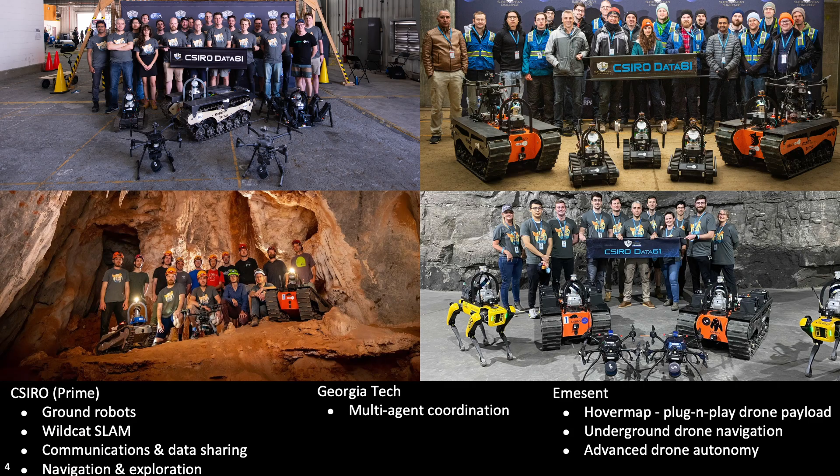This shows the Team CSIRO Data61 robots and humans through the 4 events: Tunnel, Urban, our own cave testing, and Finals. We're a collaboration between CSIRO, contributing ground robots, SLAM, communications, navigation, and exploration; Emesent, contributing aerial robotics and associated navigation and autonomy; and Georgia Tech, contributing multi-agent coordination.

This shows the evolution of the robot team through time. Here there's a few key decision points to highlight. The STIX integration event showed the inadequacy of our ground platforms. We responded by acquiring the BIA5 OzBot Titan ATR platform. Tunnel showed the excellent performance of the Titan and the strain caused by dividing our time between many platforms, so for Urban we focused on the Titan.

We also had major communication issues at Tunnel, which resulted in the switch to the Rajant-based network. Post-Urban, we were convinced of the merits of tracked robots, but wanted a more reliable small platform, so we started development of the Dynamic Tracked Robot, or DTR, and ceased development on the Hexapod. We were experimenting with various updates of the Ghost platform in the background, but earlier this year made the decision

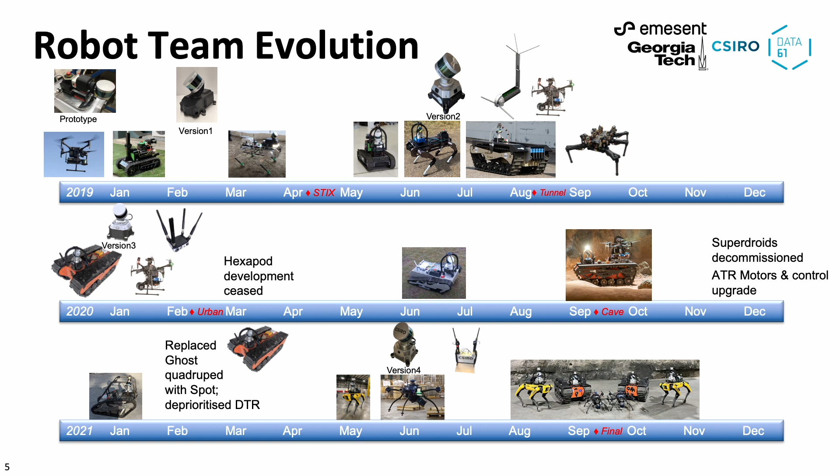to acquire Spots. At the final, we fielded a BIA5 OzBot Titan with upgraded motors and controllers alongside Spot quadrupeds and a new Hovermap UAV based on a Navi platform carrying an upgraded multi-camera perception system. The DTR was deprioritized in favor of the Spot and Titan, but we were still planning to bring them if we had a larger deployed team.

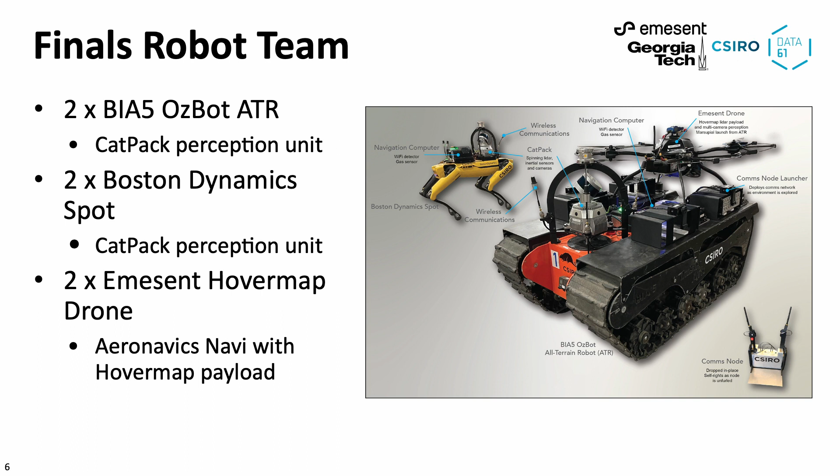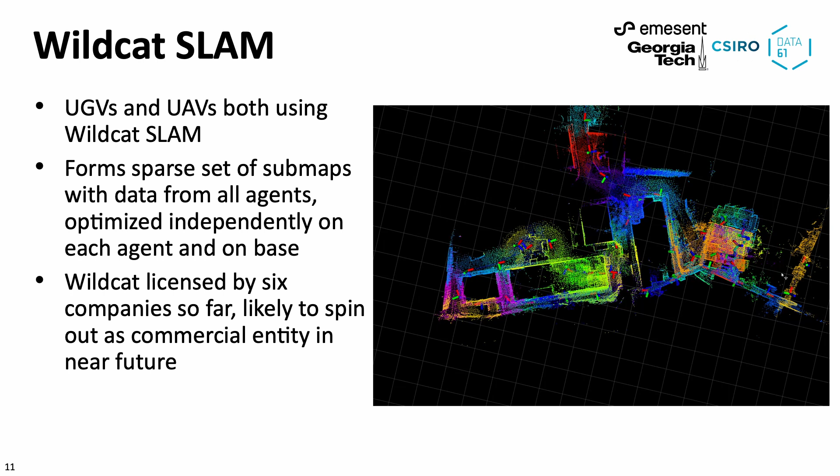First, we'll look at SLAM. Both the UGVs and drones are running Wildcat. It forms the basis of the multi-agent capability, allowing maps, objects, and navigation information to be merged on each agent. In this video, each submap is shown in a different color. We store global navigation and object detection information relative to each submap, allowing it to move as SLAM corrections are made.

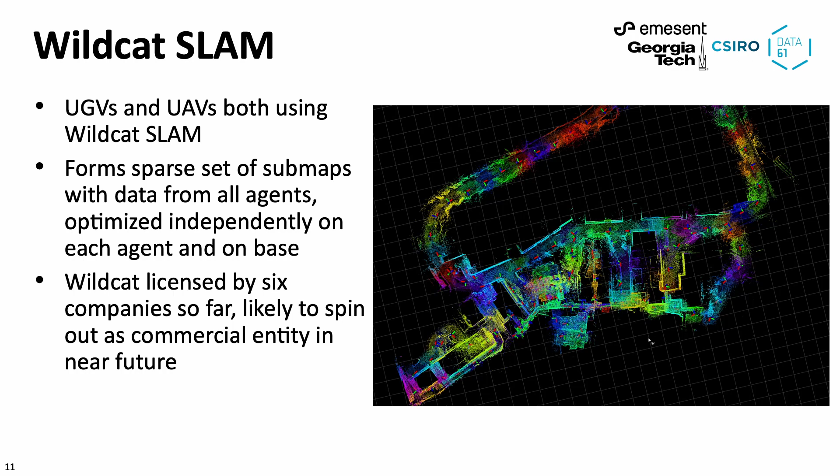Mapping is achieved through a pose graph optimization, matching surfels between subsets of frames using ICP. Further details of Wildcat can be found in the recent Tartan SLAM seminar by Kasra Khosoussi.

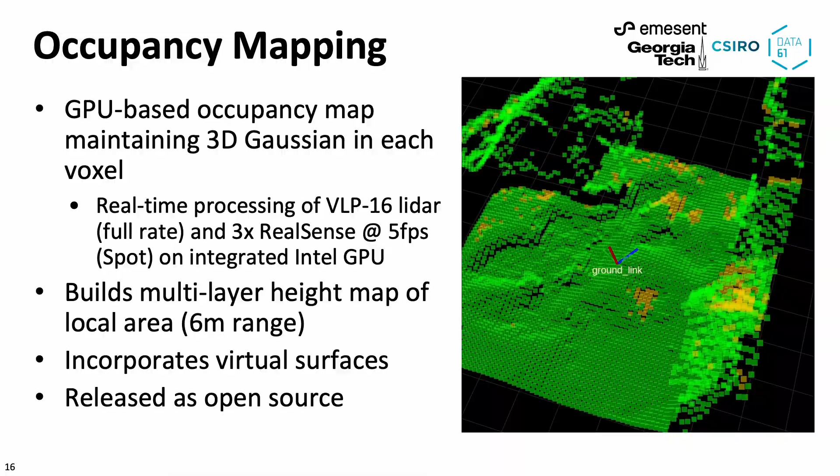The video shows observed surfaces in green and virtual surfaces in yellow as the robot moved through the cave during testing in Chillagoe, far north Queensland. OHM has been released as open source. Using height maps generated by OHM, our traversability analysis checks two things. First, the slope of the terrain under a footprint, analysing the resting pose of the object as it's lowered.

Secondly, we scan through the map looking for step discontinuities which exceed limits. The result is illustrated on the right, with virtual shown in yellow, traversable shown in green, and lethal shown in magenta.

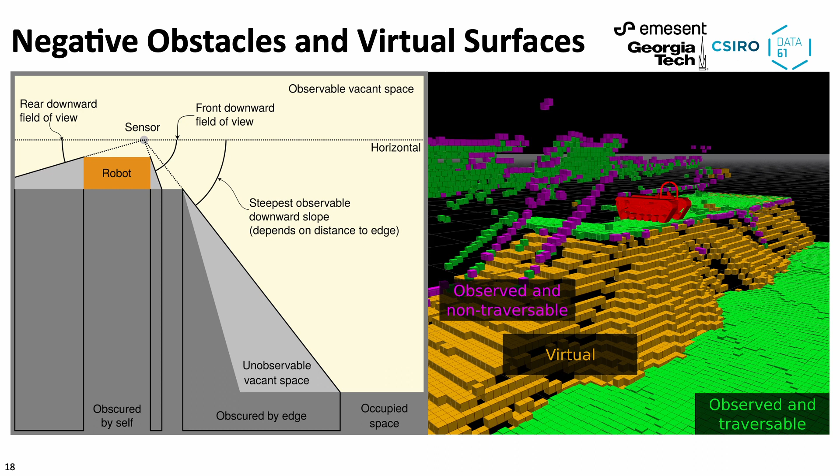Virtual surfaces provide a principled method for addressing negative obstacles. As the robot approaches the edge, it's able to plan onto the virtual surface, allowing it to continue approaching. When it gets close enough, the slope becomes steep enough to be lethal, revealing the negative obstacle. Our path planning is based around Hybrid A*, performing on-demand costing of robot footprints in X, Y, and yaw, shown here during our cave testing.

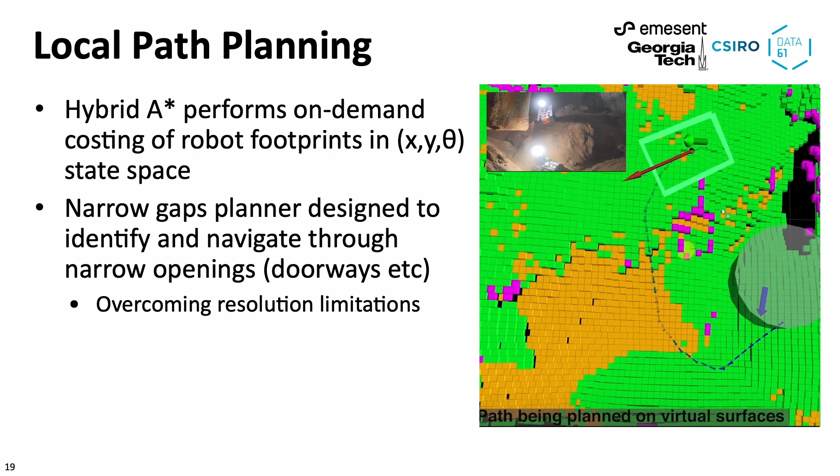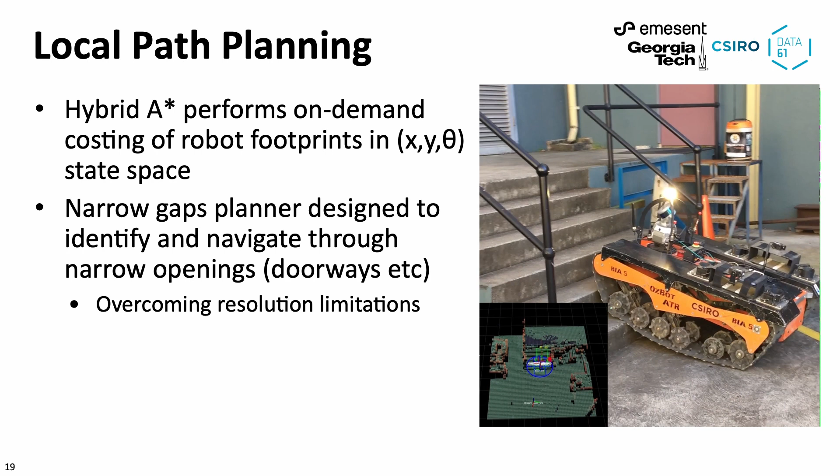We've recently introduced a narrow gaps planner, which allows us to pass through much narrower doorways, overcoming resolution limits of the existing planner.

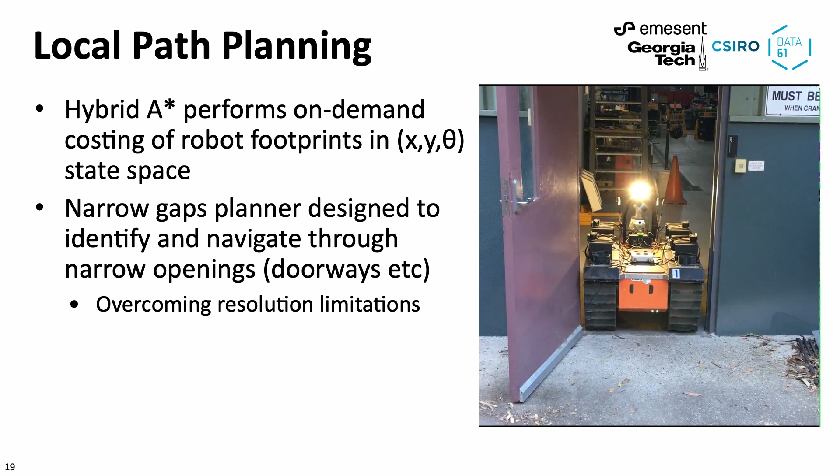Now we'll move on to global navigation. Our global navigation aims to build a consolidated map of all of the traversable space that's been observed. Navigation maps are built for each Wildcat submap, and these are shared across ground agents. Each submap is decomposed into a sparse graph using superpixel methods.

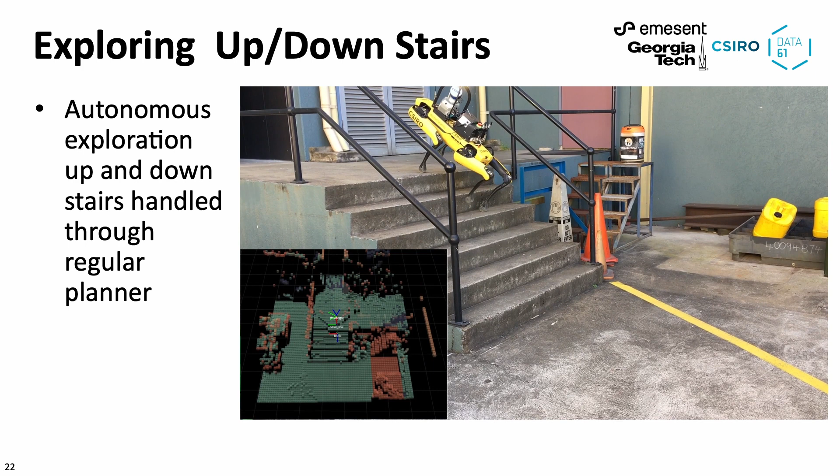Put together, our nav stack is able to handle complex environments in a general way. This is illustrated through our handling of stairs. Traversability frontiers cause the robot to be continually commanded closer to and up the stairs. Paths are planned accordingly. The planner does not distinguish between stairs and slopes with similar gradient.

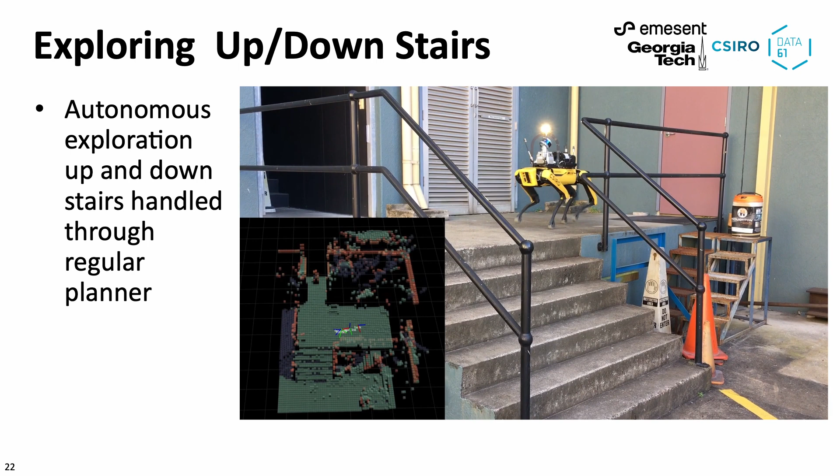The Spot robot needs to navigate downstairs backwards. This was achieved by applying a large penalty to forward motion down slopes. Hence, you'll see the robot go down slopes backwards as well as stairs.

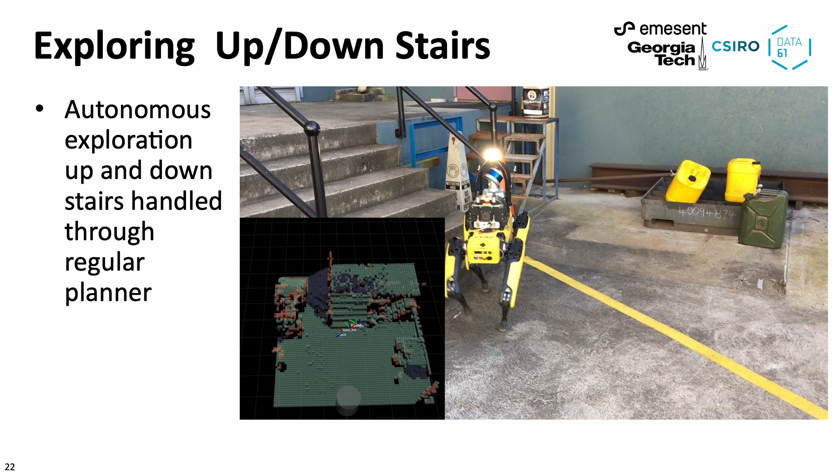We'll now look at the multi-robot task allocation and user interface. Coordination of ground-based agents is achieved through a multi-robot task allocation framework based on consensus auctions. This allows robots to construct coordinated task bundles without any central broker.

For example, the coordination between two agents continues when they have communications between each other, but not the base. Using the bidding mechanism, robots form bundles of tasks for execution. One of the challenges of this is the dynamic nature of missions, since exploration tasks continually evolve as the environment

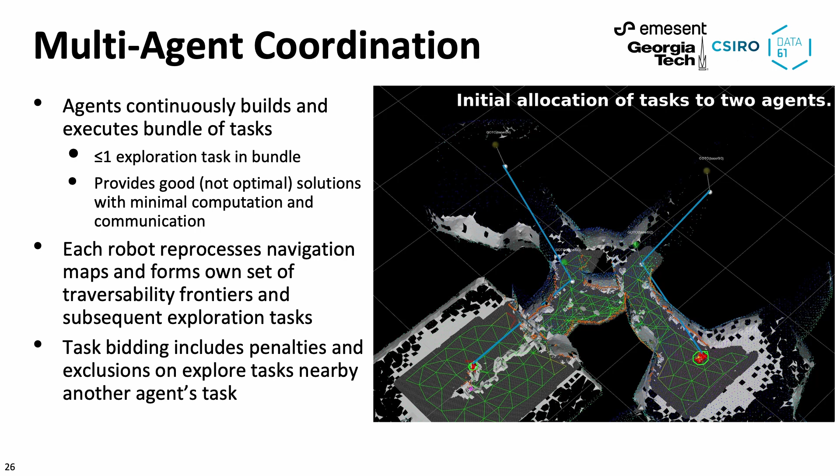is revealed. We found that having multiple exploration tasks in the bundle was undesirable due to their open-ended nature, but robots can select multiple tasks of different types. Definition of tasks is another challenge.

In our solution, each ground robot receives and reprocesses the navigation maps from each agent and forms its own independent set of traversability frontiers. Task bidding is modified to capture the equivalence of nearby exploration tasks from different agents.

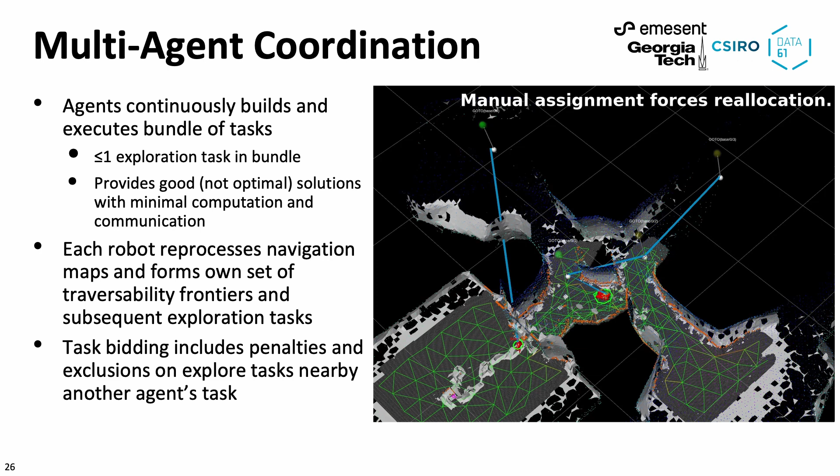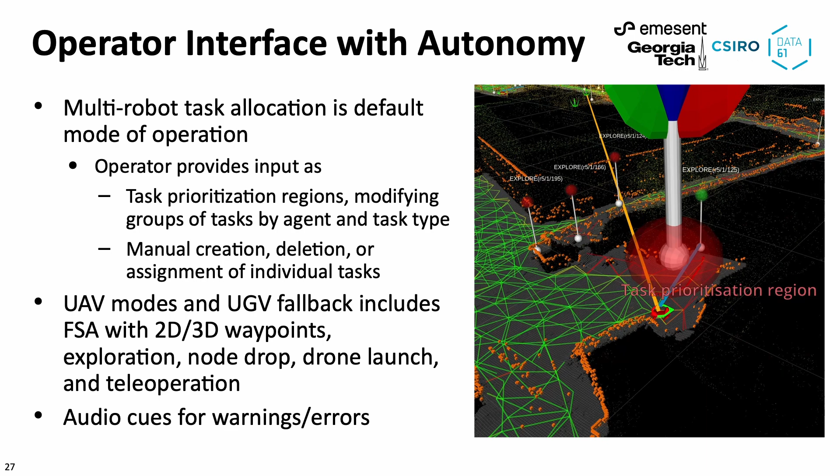The robots default to autonomous operation through multi-robot task allocation. The operator can influence decisions by creating prioritization regions or manually assigning a specific task. There's also a full suite of more manual modes, such as waypoints and teleoperation.

One thing that we added late in the piece was audio cues, which give the operator an indication that there's an event for a specific robot that they should take a look at.

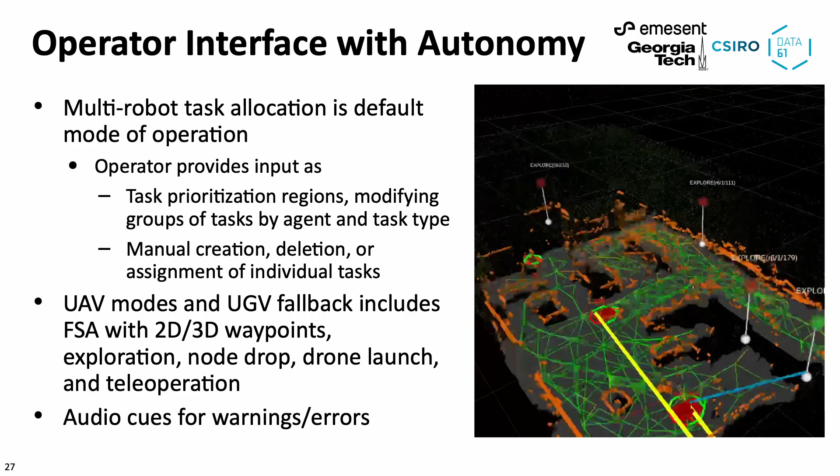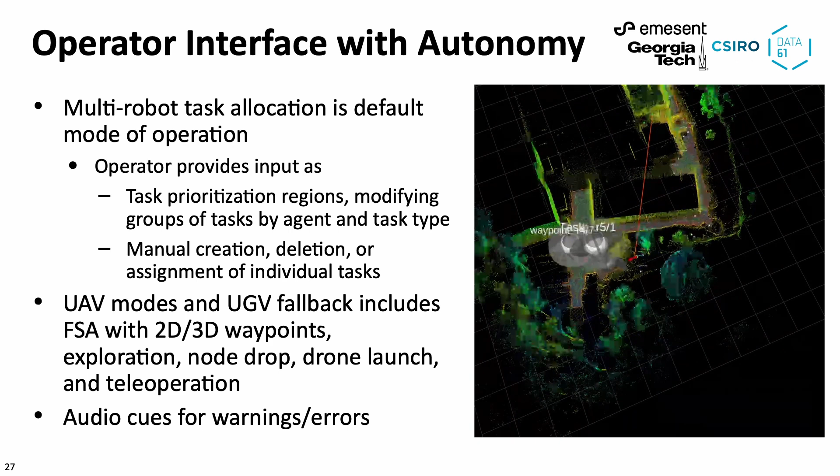We wanted to be able to set our thresholds for object detection aggressively low in order to avoid misdetections as much as possible. To accommodate this, we developed an interface that lets operators rapidly review new detections of the various object types, be it visual, Wi-Fi, and gas.

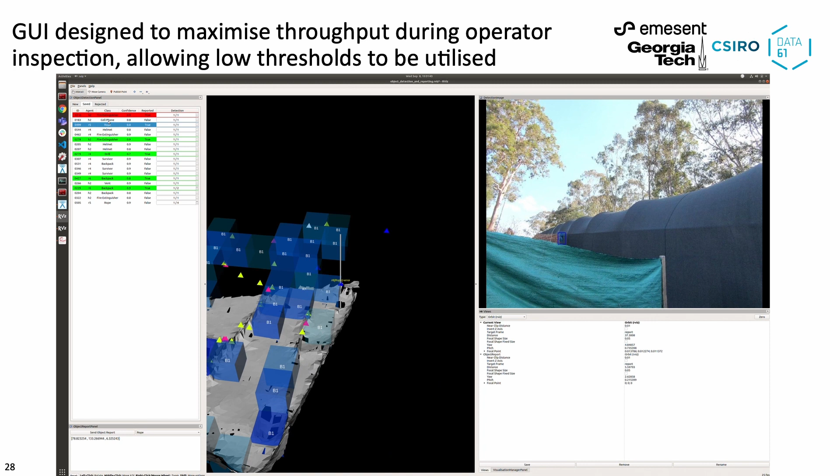Each robot and the base runs a system called Mule, which implements a peer-to-peer distributed database. This allows one agent to synchronize with another in a distant part of the course and carry that information back to the base. Multi-robot task allocation takes care of the coordination, meaning that when it's time to synchronize, only one of the two agents needs to return.

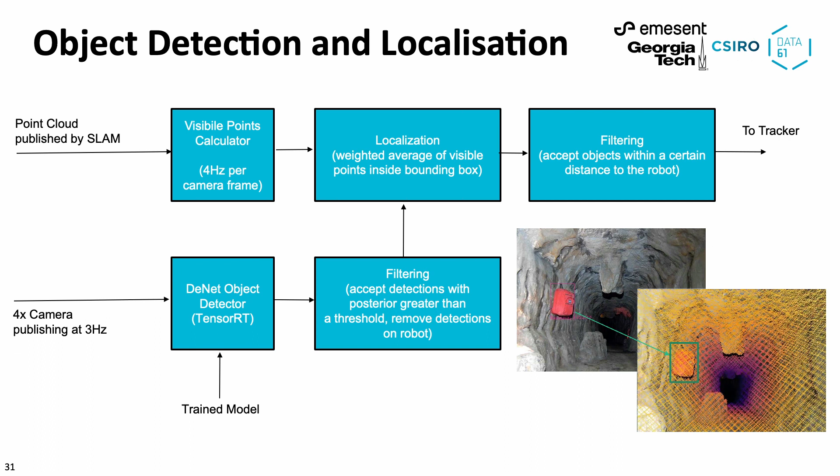Finally, we'll look at the object detector. Objects are detected using the DeNet deep learning-based object detector running in real time on the NVIDIA Xavier in the perception pack and on the drone. Visible points within the bounding box are calculated to obtain the 3D coordinate detection as shown in the image.

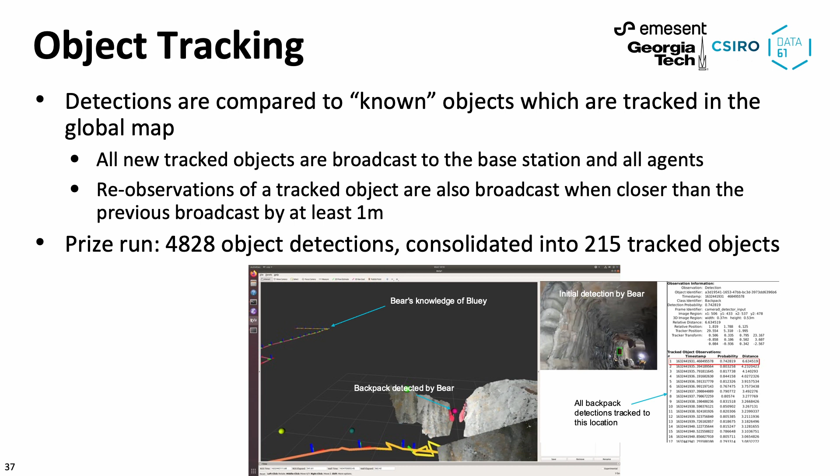This slide outlines some of the other hardware on the robots. The ground robots include gas sensors and Wi-Fi detectors shown in red and blue. The Titan features side-mounted comms node launchers shown in purple and a drone launcher for marsupial launch shown in green,

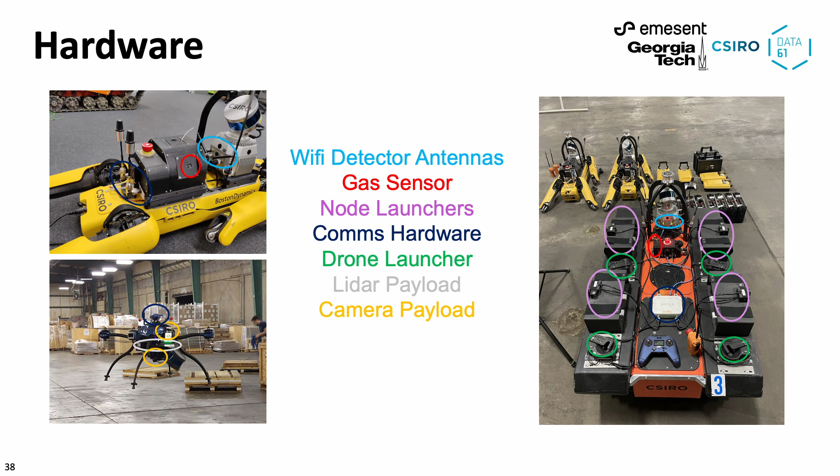The comms node enclosure helps the node to fall upright and provides raised antenna positions. The dropping mechanism drops to the side so as to avoid blocking passages and is housed within the platform footprint, a requirement that we learned during our cave testing.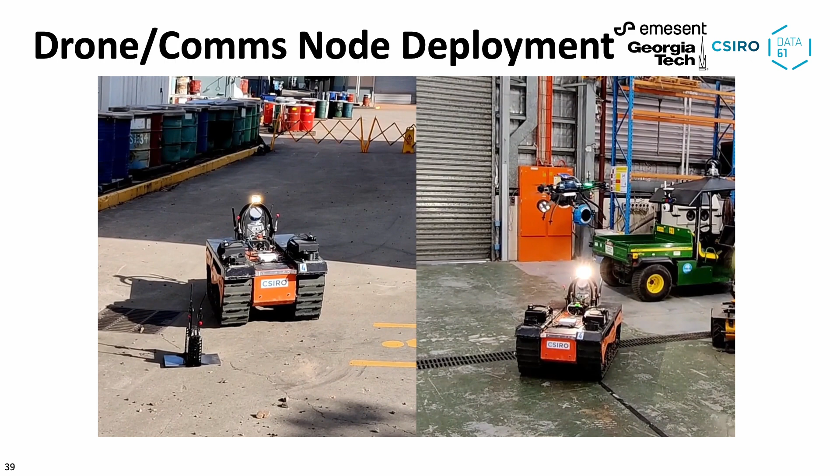In terms of results, something we're particularly proud of is how we've consistently improved as time's gone along. We came 5th at the tunnel event and 4th at the urban event. The following video shows our own cave event where we did our best to match DARPA test conditions in a cave in Chillagoe, far north Queensland. Just as in a challenge event, the environment was unseen by the operators prior to the runs conducted over 2 days. Additional developmental testing was conducted over a 3rd day.

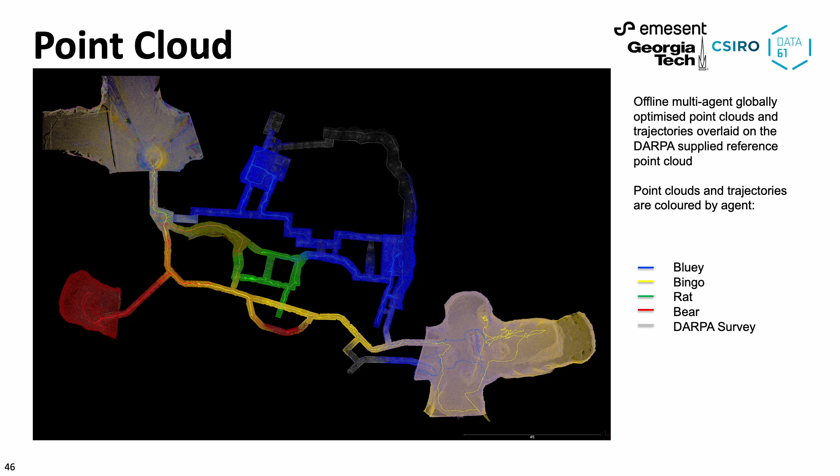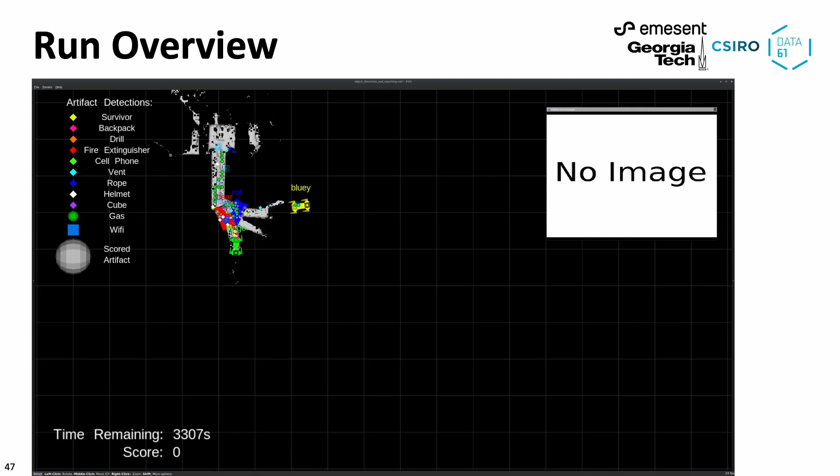This video shows an overview of the run as seen from the operator base station. Two Spots, Bluey and Bingo, are first to enter. Bluey is commanded into the urban area and closely managed to prevent it from leaving comms and entering the railway tunnel where it fell in the two preliminary rounds. This was quite time-consuming for the operator. The other agents are sent into the tunnel and cave sections. Bingo makes rapid progress into the cave section and quickly goes beyond communications.

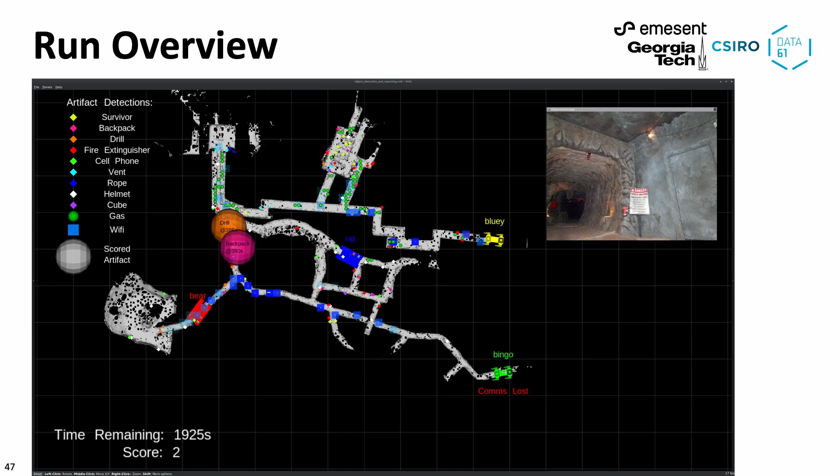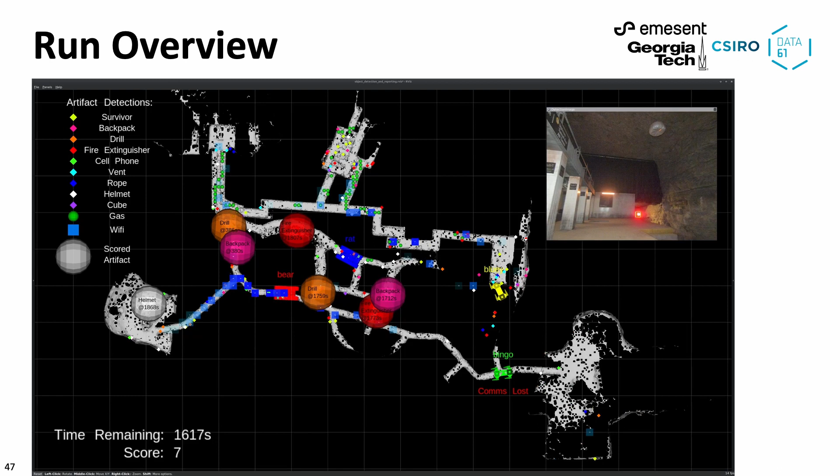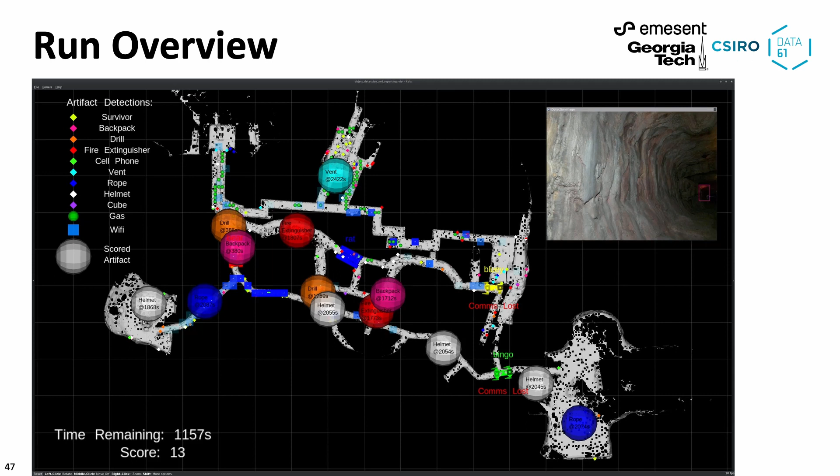Attempts to get Bear through the cave tunnels to the large distant cave were unsuccessful, with the drone making contact with the tunnel roof, so another route was sought. The two other routes were blocked, one by a dynamic obstacle and the other by the disabled ATR Rat. The operator moved to the only available plan, to launch the drone in the smaller cave and attempt the cave tunnel without the drone on board.

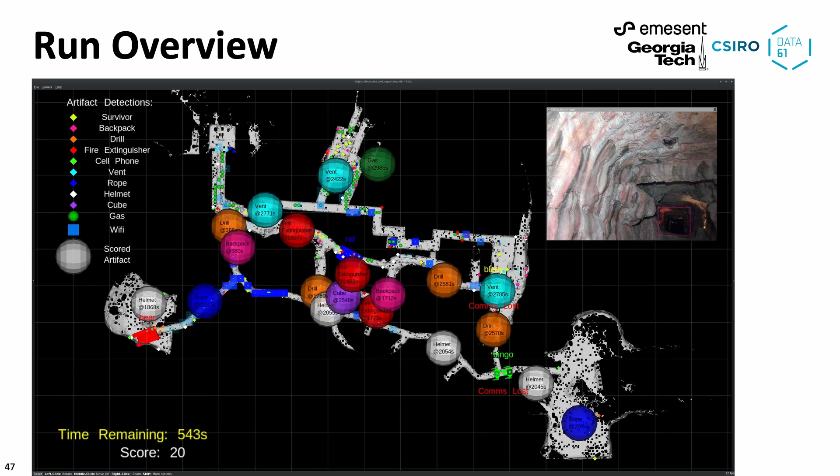Racing against the clock, this was executed through a combination of waypoints and teleoperation, along with regular node drops, to maintain a good communications backbone into the cave. A communications link was eventually established and the base began to receive data from Bluey and in turn Bingo. The link was quite low rate and full data was not received.

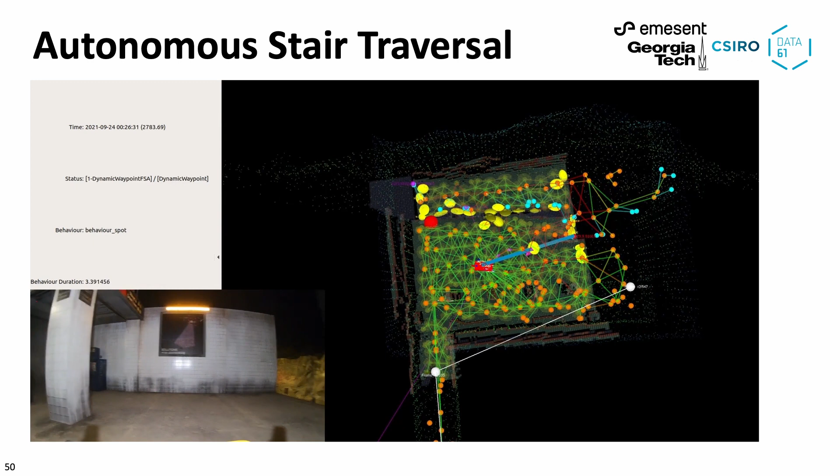It plans a path down, moving backwards due to the higher traversal cost of descending forwards. It starts moving towards the rail, but turns around due to the relatively high cost and the lower cost alternatives behind. To emphasize, this entire sequence occurs out of communications range.

Our conclusions in the final event include: we're obviously very happy with the SLAM performance. Overall, we're happy with the performance of the nav stack and object detector. The full suite of tools for autonomous operation, operator prioritization, and intervention were particularly valuable, and the peer-to-peer database was another key enabler. Obviously, there's still some obstacle types, such as the rails, that we need to address.